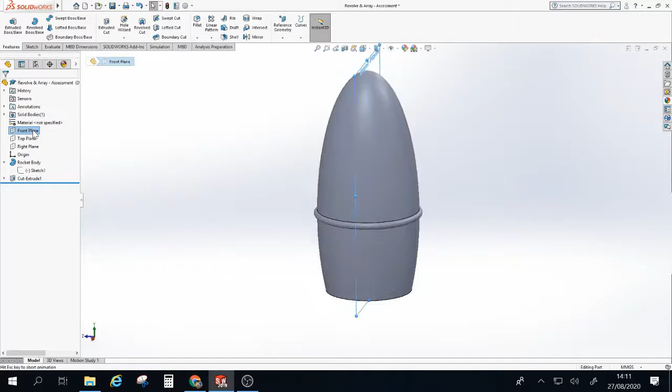The first thing I'm going to do is this bottom line here is 35 down from the bottom corner. We don't have the size going out the way, but I'm not too worried about that. I'm going to work on the front plane - I could work on the right, but I'm going to work on the front, doesn't really matter. Control 8, and I'm going to start sketching. I'm going to go from the bottom right hand corner straight down and out to the side. I'll use the Smart Dimension tool and mark in 35 down. So that's the first wee bit.

Next thing I'm going to do is draw a couple of circles. I'm going to draw a circle up here, it has a radius of 20. I'm going to draw one below it which has a radius of 10. I'll just type that down here. Confirm. Now, as you can see, this big circle is at the wrong height and it's not touching the edge here.

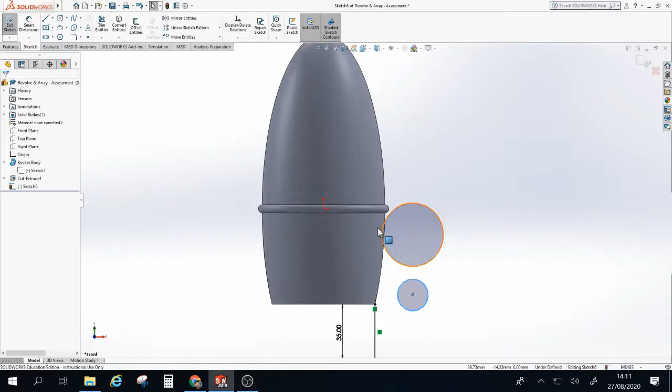So a couple of wee things we need to fix. We're going to check the drawing, just get confirmation. The smaller circle is 60 up from this bottom edge, and then we're another 30 to get to the bigger circle. So we'll just do that right now. Smart Dimension, we'll take this bottom edge up to here, and we're saying this needs to be 60. And then we're going to take this bottom edge to here and tell that to be 90.

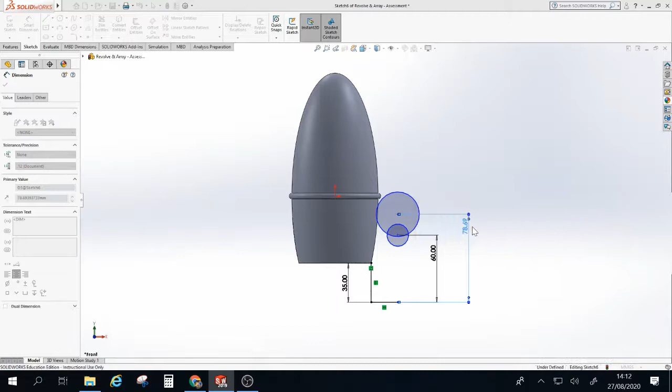So I'm happy with that. Confirm. Still not happy that this big circle is not touching the edge of the rocket body. So we're going to select that, Shift key and select the outside edge, and we're going to tell these to be tangent.

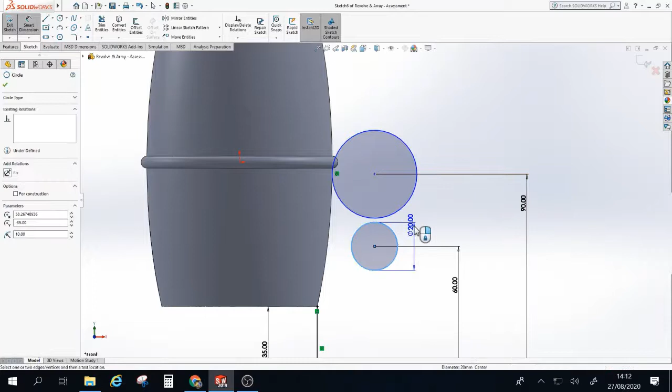So now it's kissing that edge. I'm also not quite happy that these aren't touching, so there must be a wee issue there. Let's just check our sizes. This should be 20, which it is. And this one here should be 40, which it is now. So they're now touching. So I'm happy with that.

I've got one more line to go in, which is from this corner here up to a tangent point. So we'll just pop that in. I'm going to go from here till it hits the circle. I am going to select the circle and this line, and tell them to be tangent, and that'll just bounce that out.

Now, there's obviously a little bit of trimming to go on, but I want to do one more thing. I want this edge in here to be part of the sketch. So I'm going to use a thing called Convert Entities. I select the edge - be careful that it is just the edge you're selecting, wait till it's just the edge, which is orange. Select it and confirm. And I've now made this an actual sketch.

So I can do a little bit of trimming to tidy up this profile. Trim entities - there are 5 options, I tend to default to trim to closest. There are occasions where you might choose the others, but trim to closest serves most of my purposes. I'm going to trim this part of this arc, and it hasn't worked, so we'll just undo that. We'll try trimming the top edge of this arc, see if we can get this to work, and it's not behaving itself.

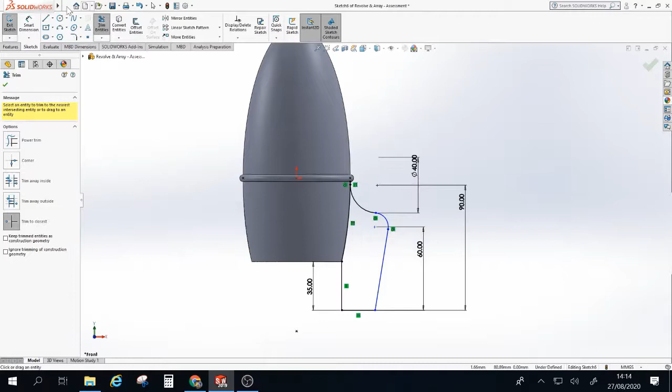So we shall add a couple more constraints. I'm going to select the circle and the big circle, and make sure they are tangent, which they are now. And that should allow me to now trim the inside of that circle and the outside of this circle. Confirm and exit sketch. You should now be able to see the profile.

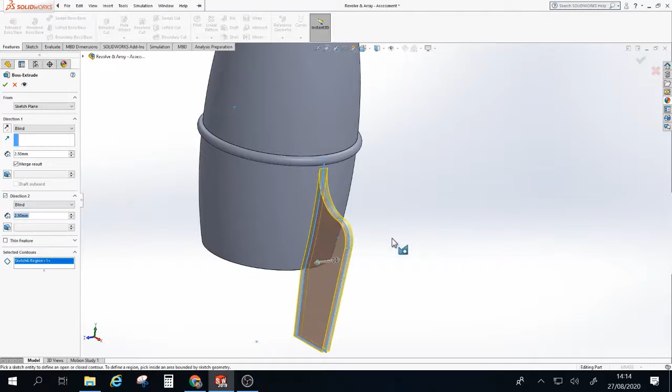Sketch 6 is our profile. We're going to extrude. Just zoom in. So we're currently extruding 2.5 millimeters out from the front plane, but I also want to go 2.5 millimeters in the other direction of the front plane. So the front plane, as you can see, which is in the blue profile there, and extruding either side of it. We'll confirm that - so there is my blade fin.

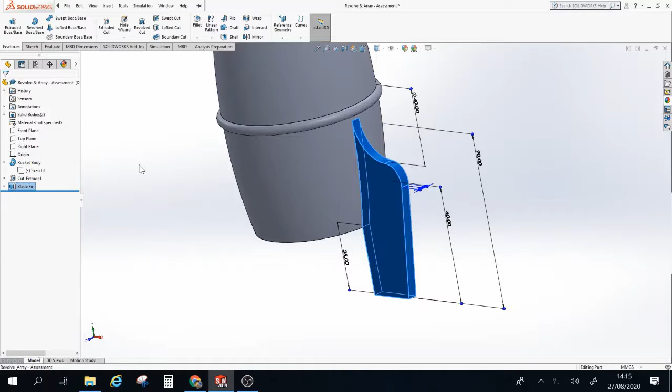Let's just name that now. So happy this is the blade fin. There we go. So that was a wee bit about tangent arcs and converting edges into sketches.

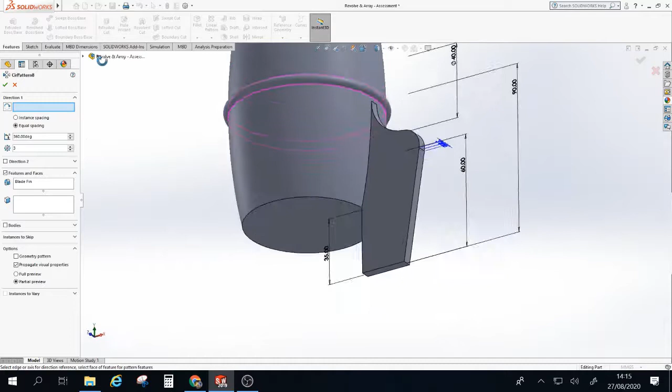Now we'll just have a very quickly take this blade fin, and we're going to use a radial array, which is called a circular pattern in SolidWorks. First thing we're going to do is tell it the direction we want to go around, so I'm going to select this bottom corner here. I've got it set to 3 in equal spacing.

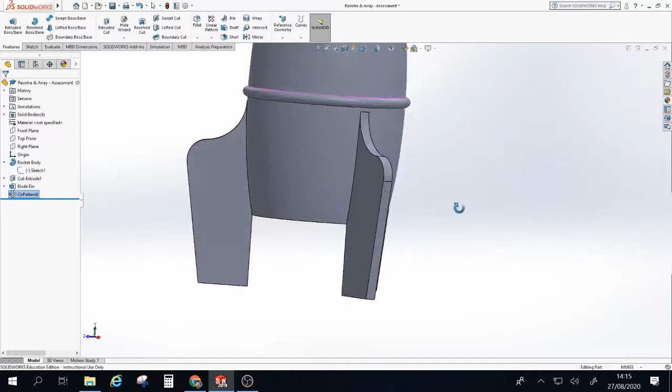I had a wee problem when I confirmed this, but a wee workaround is to select bodies and make sure you select the profile that you want to make the array of. And that seems to have solved that wee problem I was having earlier. So there we go, I have my 3 blades in place using a bit of tangency and using the radial array feature on SolidWorks. Have a go, see how you get on.